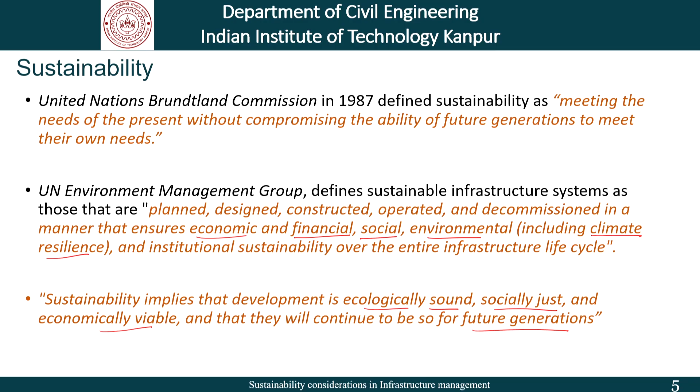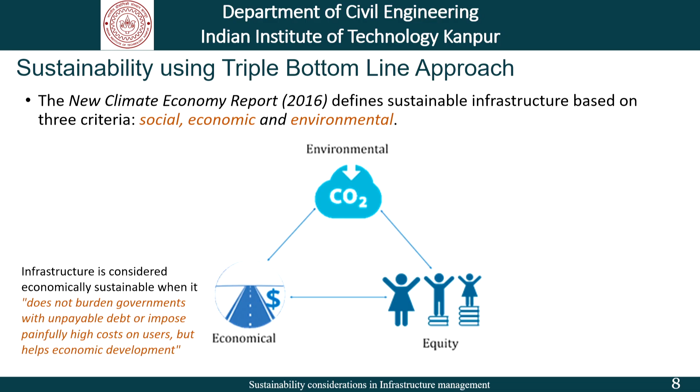Let us discuss these three aspects one by one. First, economic sustainability. Economic sustainability refers to the process where the infrastructure development should not burden governments with unpayable debts. At the same time, it should not impose painfully high cost on the users.

Moreover, the development should be such that it helps in overall economic growth. So, economic sustainability revolves around the aspect of money. We want to ensure that the development is such that it does not burden the government, at the same time it does not burden the users. Also, it should help in the overall economic development of the society.

Moving on, environmental sustainability refers to the idea that economic development should take place in such a manner that it limits environmental damage, it limits pollution and emissions at all stages of the project and also conserves natural resources. So, within environmental sustainability, the focus is on reducing damage to the environment.

Moving on, the third important pillar of sustainability is equity. Socially sustainable infrastructure means that it is inclusive, that is, it serves everyone, not just a select few, and it contributes to enhanced livelihood and social well-being of everyone. So, any infrastructure which is said to be sustainable should be economically sustainable, environmentally sustainable and socially sustainable. Socially sustainable is same as having equity goals.

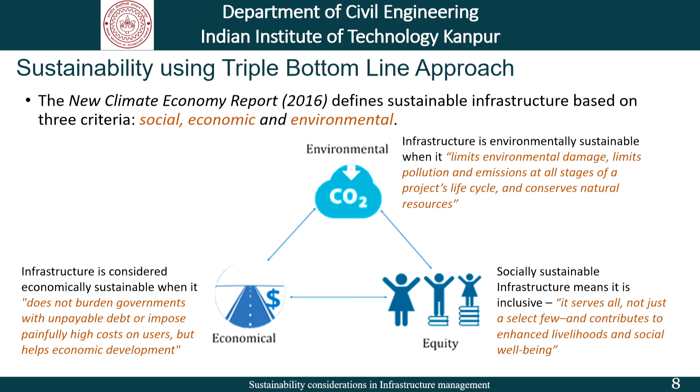I hope now we have a clear understanding of what is sustainability. It is not just constrained to environmental sustainability. It includes other aspects of economics as well as equity. Now, having discussed the idea of sustainability, let us discuss why are we concerned about it. Why do we need to account for sustainability in infrastructure decision making? The question is, why are we concerned?

It is important to note that in 1900, the world population was around 150 crores. Now, it has gone to 800 crores. It is expected that the population of the world will be around 1000 crore by 2050. If you see here, population has been exponentially rising. As population increases, we need more and more infrastructure. Increase in population leads to urbanization and economic activities.

Any urbanization consumes resources. More and more natural resources are getting consumed. Now, high use of natural resources leads to issues such as greenhouse gas emissions, waste generation, pollution and so on. Moreover, infrastructure development at a rapid pace also leads to climate extremes, biodiversity loss and health impacts. Hence, it is clear that economic growth rides on resource use, but at what cost? It impacts our climate, our health, our biodiversity and overall our planet.

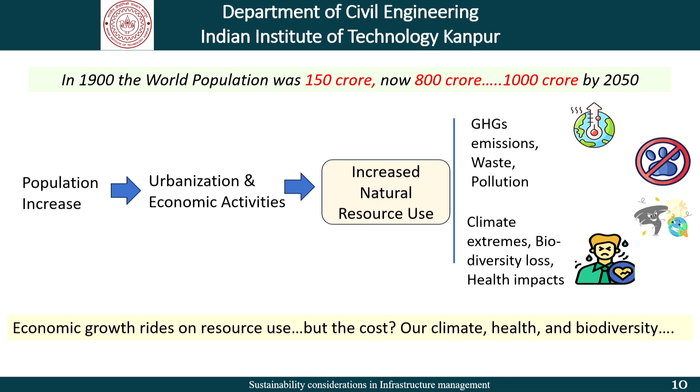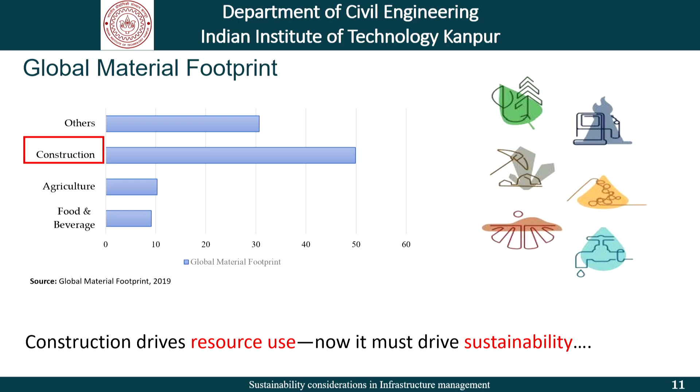Construction industry is found to be a major source of resource consumption. It is clear from this graph that construction is a major contributor to resource consumption. Construction drives resource use, and it is important that construction plays a key role in driving sustainability. Infrastructure development is critical for the economic development of a society. However, we have seen that it comes at some cost.

Construction has several impacts on the environment. It is found that construction activities consume around 100 billion tons of non-renewable resources per year. Moreover, out of the total greenhouse gas emissions, 60% of them can be accounted for due to construction. Similarly, out of the total biodiversity loss, 80% of it is due to infrastructure development. Moreover, 60 to 70% of C&D waste, which is construction and demolition waste, ends in landfills, which again impacts the environment. Overall, construction activities impact health, impact resilience, and also the environment.

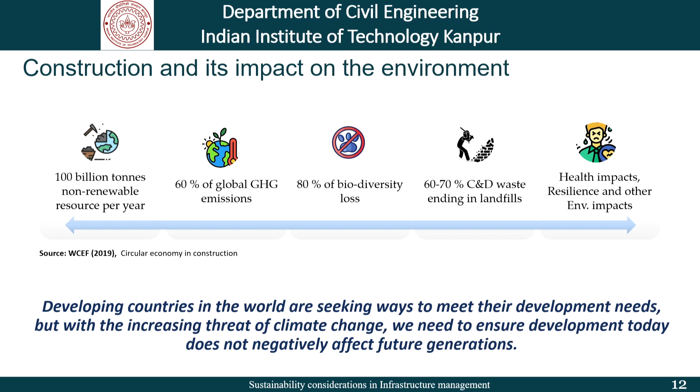Thus, it is important that developing countries which are focusing on meeting their development needs adopt a more sustainable approach. This is increasingly important because of the growing threat of climate change. We need to ensure that the development today does not negatively impact future generations. Governments and organizations all over the world have taken several steps to promote sustainability goals. Let us talk about different sustainability efforts in the last 50 years.

In 1972, UN conducted the first conference on human environment. This was the first major international environmental summit. At that time, sustainability goals were centered around environment. Then in 1987 came this definition where it was discussed that it is important to meet the needs of present generation without compromising the ability of future generations to meet their need. Then in 1992, during the Rio Summit, the Global Agenda 21 for Sustainable Development was introduced. This is the time when the thought process moved from purely environmental goals to further include economic and equity goals.

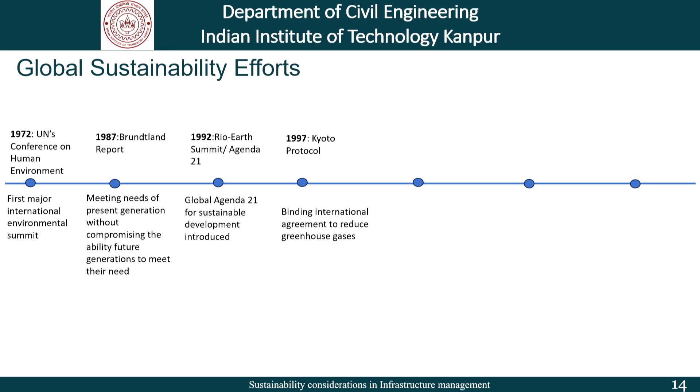Then in 1997, the Kyoto Protocol came, where binding international agreements were signed to reduce greenhouse gas emissions. Later in 2000, the Millennium Development Goals were developed. 8 goals around hunger, poverty, discrimination and environmental degradation were discussed, deliberated and adopted.

More recently, in 2015, the UN came up with the Sustainable Development Goals. Agenda 2030 was discussed. This included 17 goals covering broader socio-economic and environmental issues. And at the same time, the Paris Agreement was signed. Here, it was discussed that globally, we want to limit the overall global warming to 2 degrees Celsius of the pre-industrial level.

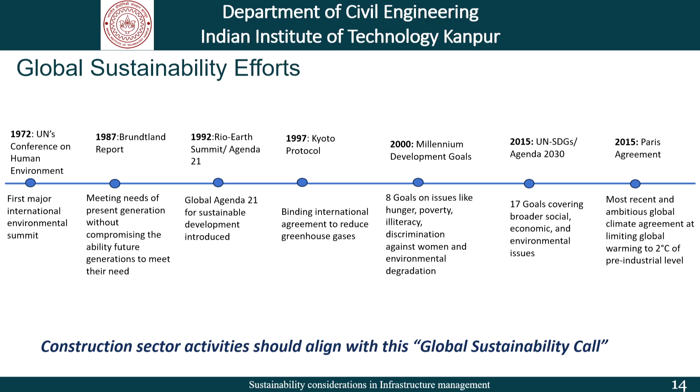So, we see that there have been several sustainability efforts which have been undertaken in the last 50 years. It is important that the construction sector and its activities also align with the global sustainability call. The current development around sustainability revolves around the 17 UN SDG goals. Let us talk about them briefly.

In 2015, the UN came up with 17 Sustainable Development Goals. These were around 5 P's. First was people, second was planet, third was prosperity, fourth was peace, and fifth is partnership. So, these 17 goals were defined within the realm of 5 P's. If you see here, there were different sustainable development goals like no poverty, zero hunger, quality education, and so on.

Some of these are directly linked with the construction industry. For example, Sustainable Development Goal number 12, which deals with responsible consumption and production. As we have seen, the construction industry widely consumes natural resources. So, responsible consumption is an important aspect. Climate action is another important aspect.

Moreover, industry, innovation and infrastructure, goal number 9, is also linked with infrastructure management. Goal 11, which is around sustainable cities and communities, is also linked with infrastructure management, and so on. So we see that the construction industry as well as infrastructure development has a key role in ensuring the UN SDG goals are met.

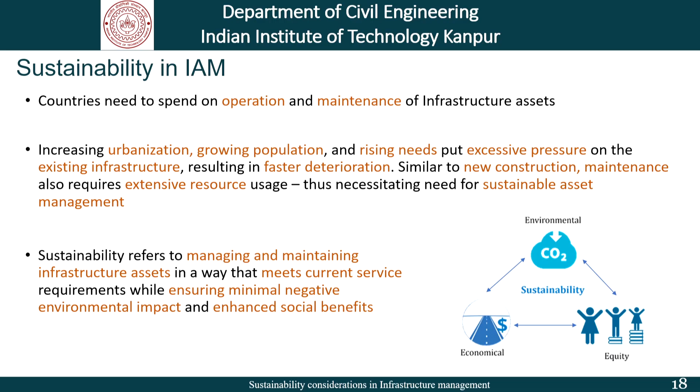Sustainability refers to managing and maintaining infrastructure assets in a way that meets current service requirements while ensuring minimal negative environmental impact and enhanced social benefits. Sustainability management, as we discussed in the last lecture, revolves around optimizing asset performance while protecting the environment and ensuring social benefits. This is done by setting up different measures of sustainability, monitoring and evaluating against these targets, and finally making informed interventions.

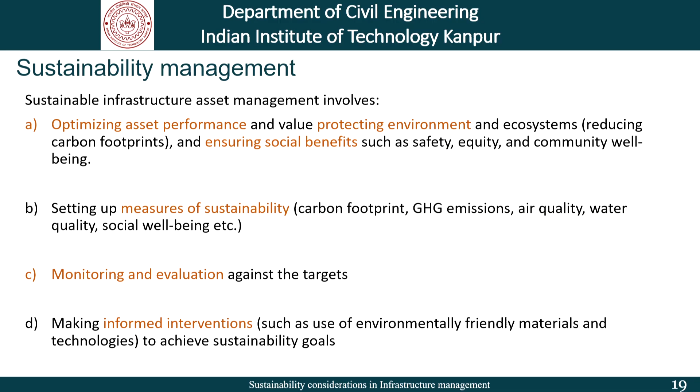Now, in this particular lecture, we will take a case example where we will discuss how different aspects of sustainability can be integrated into asset maintenance of highways. Sustainability in practice: case example of highways. This is a small example which will help us in understanding how asset maintenance of roads can be done in a sustainable manner. Let us discuss a case example of highway asset management.

As we have seen, any sustainable asset maintenance will include three aspects: economics, environment and equity. In the context of roads or highways, what are some of the economic considerations? The first and the major economic consideration is you want to keep the overall budget in check. That is, you want to keep a check on the overall expenditure. This means reducing the overall life cycle cost of constructing, maintaining and demolishing an infrastructure.

Overall life cycle costs include two key aspects, the agency cost and the road user cost. Now, when it comes to agency cost, it includes the direct cost of maintaining a highway asset. For example, you construct a highway, say in year 0, and you put X amount of money. Now, to maintain this road in a good condition, one needs to do maintenance, say every 5 years. So, this is the maintenance cost. The goal is to focus on reducing the overall maintenance cost.

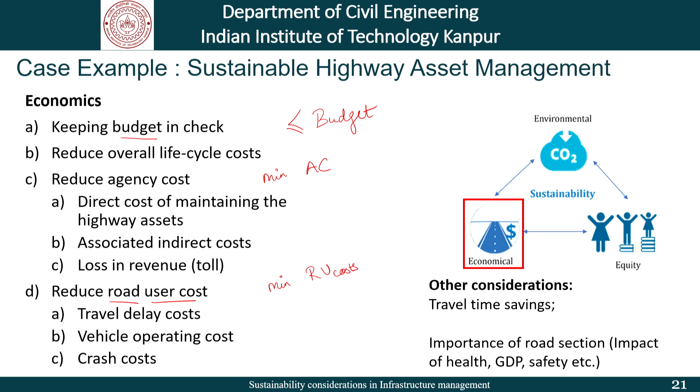Now, in addition to economics, there are other considerations of environment and equity. Let us discuss some of the different environmental goals. Environmental goals revolve around the following. The primary focus is on reducing the overall greenhouse gas emissions due to two aspects. First one is the construction material which will be used, for example, asphalt which is being used for construction of road, and second is the emissions due to the construction activity and equipments which are used to maintain this particular road.

Moreover, there are considerations of increased emissions from vehicles due to poor road conditions. Say there is a road section which has higher roughness, then it is likely that there will be longer travel times and increased emissions from the vehicle. Moreover, there can be increased fuel consumption in work zone areas. If you are doing maintenance of a given road section, it is likely that work zone congestion leads to increased periods of acceleration, deceleration and idling, thus resulting in higher GHG emissions.

So, when maintaining an infrastructure, the different environmental considerations include the ones due to the direct material consumption, second due to the equipments which will be used for construction activity, the third one is around what are the impacts of not maintaining the road on time, and lastly it depends on the work zone area. If the maintenance will take a lot of time, then the congestion will be there for a lot of time, which will lead to increased fuel consumption. On the other hand, if there is a lighter maintenance activity which can be completed quickly, then the work zone congestion can be reduced to a few days or a few weeks. Thus, we can reduce some of the increased fuel consumption due to work zone areas.

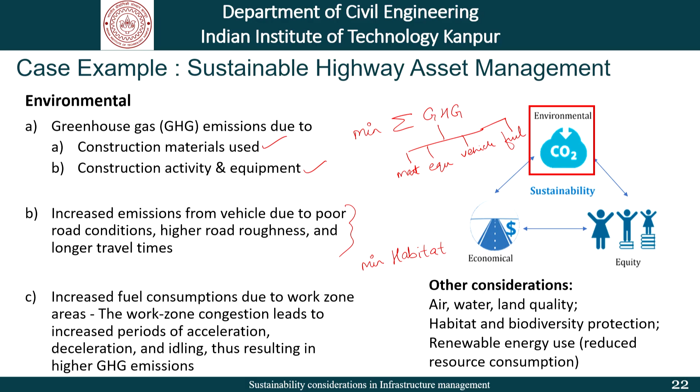Now, beyond economics and environmental goals, there are some social equity considerations. Let us talk about them in the context of road highway asset management. Equity decisions relate to safety of members in a community. If there is a road section which is unsafe for use, then it is likely that the community members are at risk. Especially if it's a vulnerable community, then their exposure to this risk is further increased. Thus, it is important to ensure safety of the members by doing maintenance at the right time. Next, the community members might be exposed to high levels of air pollution. Again, doing asset maintenance at the right time can potentially improve air pollution levels.

There can be considerations of noise levels in a society. You might want to plan your highway asset maintenance in such a manner that the noise levels are reduced. Moreover, a good quality road will have business appeal. Also, it will have economic attractiveness for the community. We have seen that a good quality road often leads to economic development in a region, which directly relates to social equity.

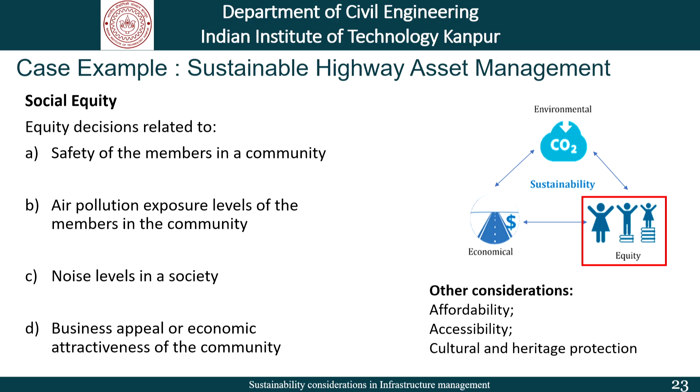Thus, it is important that in addition to economics and environmental goals, equity goals are also accounted for in the decision making. Other equity considerations include affordability. Affordability means that you want to ensure that the cost of travel is minimum, especially for communities where the income levels are low. Further, roads play an important role in ensuring accessibility to different markets and regions. This is another important equity consideration. Lastly, you want to ensure cultural and heritage protection. All these are different equity goals which need to be taken care of during highway asset management.

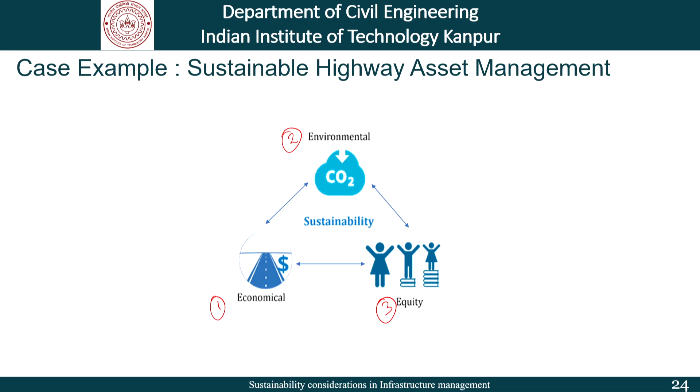Thus, a decision maker responsible for management of highway assets needs to account for economic goals, environmental goals, and equity goals. However, it is not that easy, especially because there are constrained budgets. We don't have enough money to take care of all the goals at the same time. Moreover, some of these goals are often conflicting in nature. That is, if you try to do a project to improve economic goals, it might come at the cost of environmental goals. That is, there are some trade-offs in economic, environmental and social equity goals.

Let us discuss one such example. Say you have two options. One is to perform high cost intensive M&R activity. If you do a high cost intensive M&R activity, it can lead to significant improvement in the individual pavement condition. However, this will be at the cost of increased greenhouse gas emissions due to construction and traffic disruption. So, we see that more cost is employed, which significantly improves the pavement condition, which is a plus. But this is happening at the cost of increased emissions and increased traffic disruptions.

Moreover, in a budget constrained scenario, since the budget is limited, doing high cost intensive M&R activities can lead to a limited number of sections getting treatment. Thus, resources are inequitably distributed. So, it has a negative impact on the equity aspect. On the other hand, conversely, if we choose less intensive M&R activities, then there will be lower traffic interruptions. Also, there will be a marginal reduction in greenhouse gas emissions due to construction. Further, under budget constraints, we could actually fund more projects. So, equitable distribution is possible.

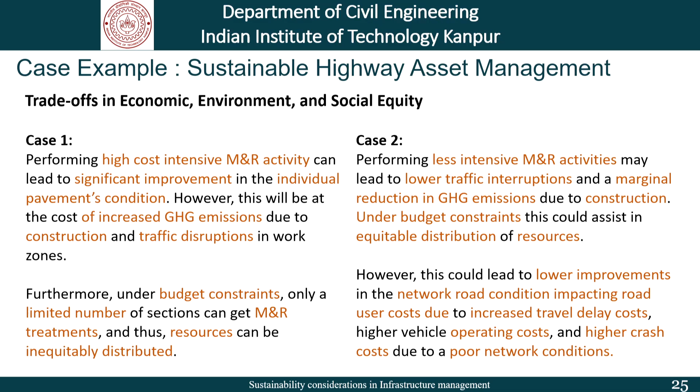However, if we do less intensive M&R activities, the overall improvements in the road condition will be low. There is a likelihood that the user cost will increase. There can be chances of increased travel delay costs, vehicle operating cost, as well as crash cost due to poor network conditions. Moreover, less intensive M&R activity might mean that our infrastructure, in this case a road, needs to be maintained again and again, which means the disruptions due to work zones will again increase. So, we see that some of these economic, environment and social equity goals are actually conflicting in nature. Moreover, under a constrained budget, it becomes difficult to account for all these goals concurrently.

Thus, a decision maker, when planning for sustainable highway asset maintenance, needs to account for environment, economics and equity. Under a budget constraint scenario, managing all these three aspects is difficult, more so because some of these goals are conflicting in nature. Thus, to summarize, we see that decision makers need to account for sustainability when developing asset management plans. This is a challenging task as it involves several conflicting objectives. It is important to come up with a framework which concurrently focuses on all the three objectives while taking M&R decisions. Nonetheless, it is a key consideration and we should definitely account for sustainability in infrastructure management decision making.

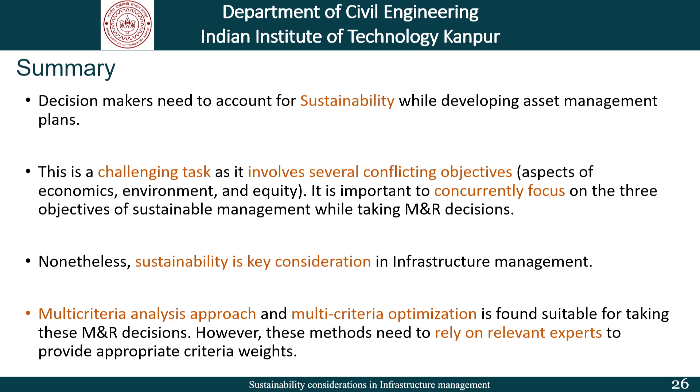Multi-criteria approaches and multi-criteria optimization have been found suitable for taking such M&R decisions. However, some of these methods rely on relevant experts to provide appropriate weights. I hope the discussion we had around AHP is clear. For example, we saw that in AHP, when prioritizing different criteria, one needs to rely on experts' judgment, which brings some level of subjectivity, but still one needs to do that to come up with a more systematic approach for multi-criteria decision making. With that, I want to end this discussion here, where we have discussed different aspects of sustainability considerations in infrastructure asset management decision making.